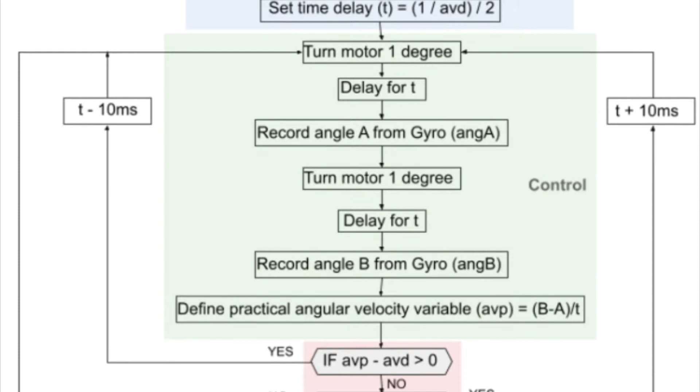The program system design consisted of 3 major parts, including setup, control, and correction. The general goal of this design was to use 2 control cycles to ensure a particular angular velocity was reached. This involved moving the servo motor and recording its angular displacement twice so that an average velocity could be checked against the desired angular velocity. If the 2 values did not match, the servo motor delay time would be changed in order to achieve the desired angular velocity.

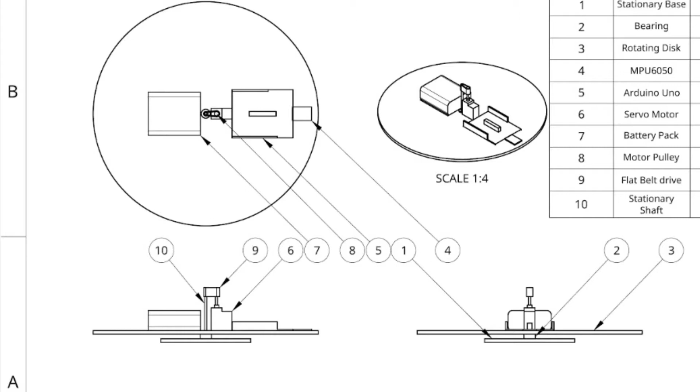The design of the roundabout consists of 3 major sections, including the stationary base, the rotating disc, and power transmission. The original design contributed a flat belt drive system that generated a power ratio of 2:1. This was done because the servo was limited to 180 degrees of turning freedom, which was not ideal for a full rotating system. After consideration and experimentation, it was decided to use a gear drive system instead of a flat belt drive system, so as to minimize the risk of slipping, which would decrease the accuracy of rotation.

In hindsight of the roundabout system design, the manufacturing process consisted of 7 major steps. Firstly, all major components were cut and appropriate holes were drilled in order for the shafts to fit. Secondly, the 4 40mm long base legs were fitted into the outer holes of the base plate and glued in place. Thirdly, the gear drive as well as the 10mm center shaft were fitted and glued into the center hole of the rotating disc.

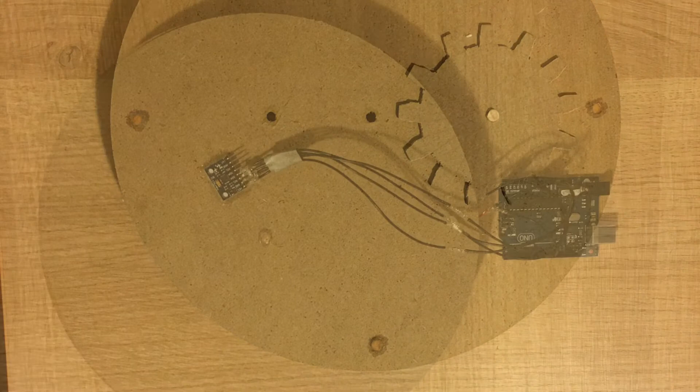Fourthly, the 10mm drive shaft, circular connector, and servo motor holder were fixed together using glue. Fifthly, the assembled drive shaft was slotted through the base plate into the gear drive with a metal washer between to minimize friction. Sixthly, the driven gear assembly was placed on top of the gear drive and base plate. It should be noted that another 6mm metal washer was placed in between the driven gear assembly and base plate in order to minimize friction.

Lastly, the base plate and attached rotating disc was placed on top of the servo motor whilst the legs were fixed to the ground. Now that the roundabout system has been assembled, the testing procedure can commence.

Firstly, Test A experimentally tested the ability of the servo motor to turn 45 degrees and 160 degrees. As it can be seen, the servo motor was successfully able to turn 45 and 160 degrees. It should be noted that the servo motor was not able to successfully complete a full revolution. This could be due to multiple reasons. However, the presence of friction within the gears could be the cause of limiting full rotation.

Secondly, Test B experimentally tested the ability of the motion sensor to measure changes in angle as the roundabout spun. Through the use of the serial monitor, the gyro angles along the z-axis were displayed as the system turned at the specific angular velocity. From the serial monitor, it can be seen that the gyro sensor was successfully able to record the change in angle. It can be seen, however, that the change in angle was not as smooth as anticipated. This could be again due to multiple reasons. However, the initial inertia of moving the disc could be the cause of sudden changes in angular displacement.

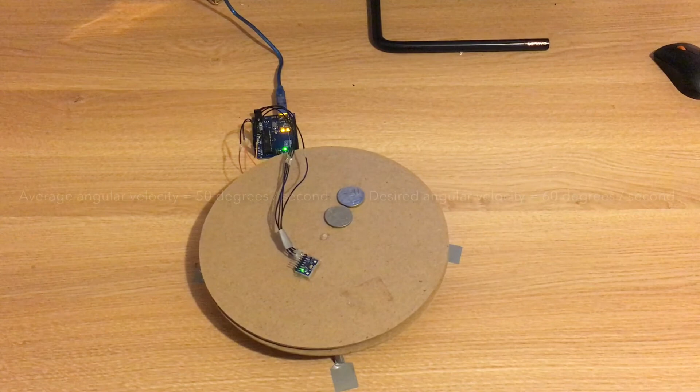Thirdly, Test C experimentally tested the accuracy of the roundabout system when subjected to weight. To test this, 20-cent coins were stuck to the top of the board. As it can be seen, the average velocity of the roundabout was roughly equal to the desired angular velocity specified in the code. The position of coins on the outside of the board could be the cause of slight inaccuracy, as unequal moment caused the board to slightly oscillate.

Fourthly, a different angular velocity value was inserted into the Arduino code, which was slower than the original. It can be seen that the average angular velocity was roughly equal to that of the input value. Lastly, erratic movement was induced onto the roundabout system in an attempt to decrease the accuracy of the system. This was done using a 30cm ruler to lightly tap the top surface. It can be seen that the average velocity was not heavily affected, thereby proving the reliability of the system.

From these tests, the roundabout system was proven to produce accurate results despite inducing weights and erratic movement. Anomalies encountered during the test procedure included slight differences in average velocity and the limitation of not turning 360 degrees. This was mainly due to the build-up in friction between the underlying parts.